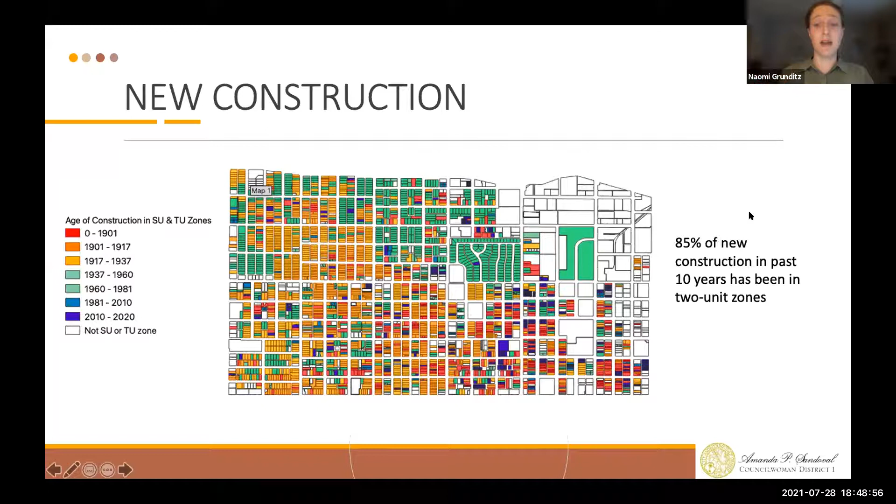In fact, 85% of new construction that's happened in the past 10 years has been in the 2-unit zones. And here's that map again, so you can see how that tracks with where the zoning was.

So I do want to point out a couple of things. One, this overlay is not about changing the underlying zoning, and it does not change the underlying zoning—for example, where duplexes can be built, where single unit houses can be built. I also want to point out that within the single unit area, there's some diversity in zoning that allows ADUs. So there are these zone districts that have a 1 at the end, C1 and B1, that allow accessory dwelling units. There are some areas here where people have been building accessory dwelling units, and they sort of have multiple units on those as well.

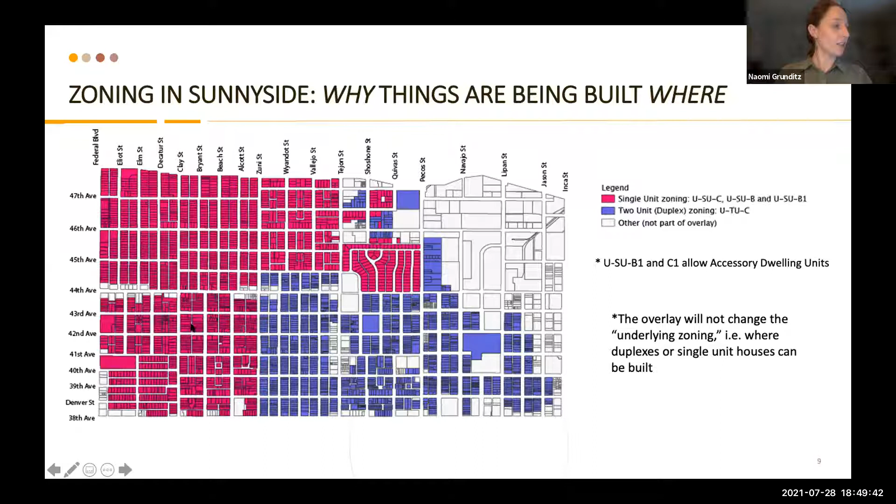Since we're going to be talking about the building and zoning codes, I wanted to first show you an extremely complex and unreadable page from the zoning code. So Denver has a form-based code—really a hybrid code, but when we say form-based code, it means our regulations about building involve more the spaces and volumes that certain types of buildings can take up in different places, versus specifying what goes in them.

So in our 2-unit and single unit districts that we're talking about today, you've got these two building forms you can choose from. There's actually another one called a tandem house, but the duplex form is usually the most common used in areas that allow duplexes. And the urban house form is really the house box you can build a house in, in both districts. So I just wanted to show you what the pages look like.

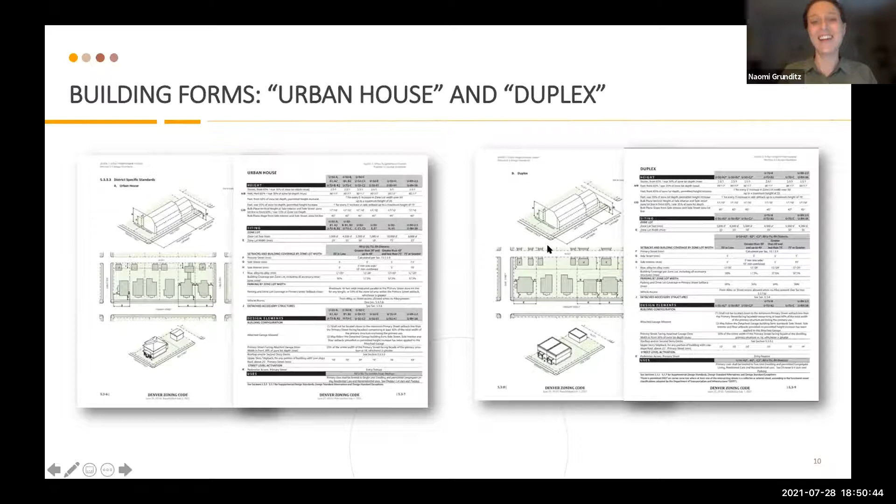I'm going to break it down, hopefully in a much more understandable way. So here is what we call this imaginary, invisible glass box that constrains what you can build on your property. It's called the bulk plane.

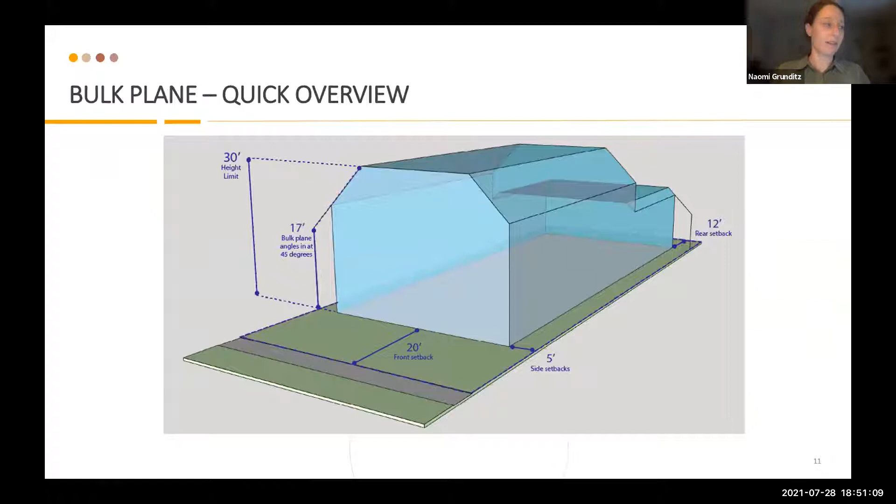This version of the bulk plane applies to both the duplex form and the urban house form I just talked about, so that makes it easier. We'll walk through what it looks like. Essentially, a house has to fit inside it.

This house model I chose is a larger, almost 4-square-ish looking house. It's like 3,000-something square feet, actually pretty big. You can see how it fits inside the bulk plane. There's a few things that can stick out—you're allowed to have little bits of eaves, chimneys, porches, other things can stick out of the bulk plane a little bit, and that's specified in the code.

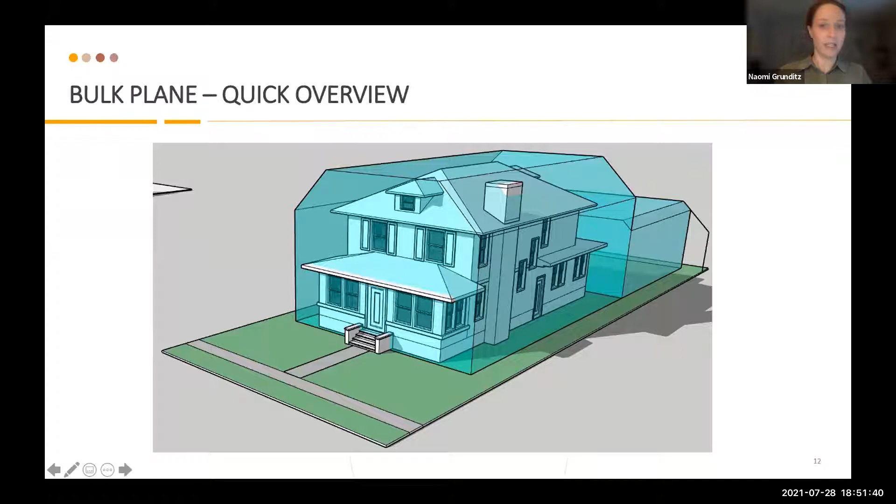But really what's important is these numbers here. The bulk plane, the buildable area, this glass box cuts off at 30 feet. That does go up a little bit on wider lots—you're allowed to have a little bit more height for the widest lots.

In general, the average property size in Sunnyside, both in single unit and 2-unit areas, is 50 feet wide and 125 feet deep. So we modeled a lot on that.

That would be a height cap, a hard cap of 30 feet. It's also a cap of 2.5 stories. A half story is a strange concept, but this is what it is in the zoning code. It's basically a story that is smaller than the story below it by a certain percentage. In Denver, 75% - so this story is 75% or smaller than the story below it. And the area we're counting is where that story is at least 6 feet in height from the floor to the top of the roof. So that's what a half story is.

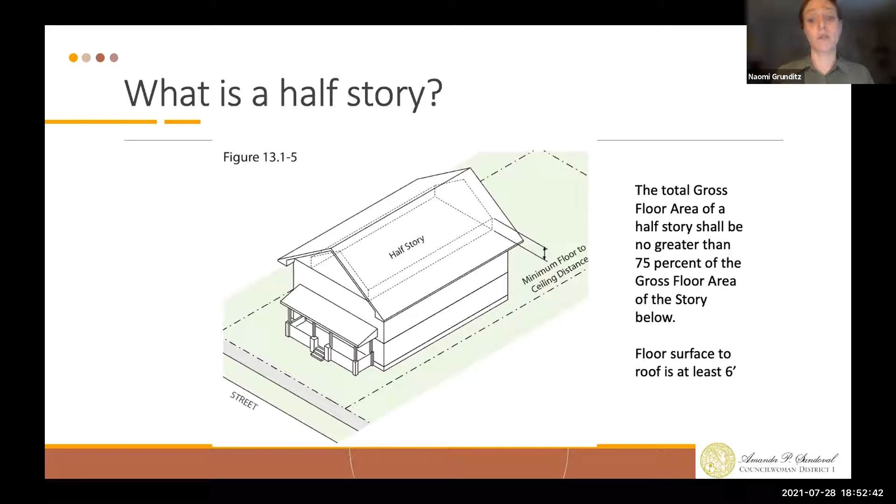Another important part of this invisible glass box is the bulk plane itself, which is this 45-degree angle that goes in at the property line. Currently it starts at 17 feet and goes in, kind of shearing off the sides, as you can see there.

There's also setbacks, meaning you can't build right next to your neighbor's property. These numbers change a bit based on the width of your property - smaller properties get less restrictive setbacks. But we're talking about an average 50-foot wide lot here. You have a setback of... I'm sorry, this chart is actually wrong, the image is correct. It's a 5-foot setback on both sides from your neighbor's property, and there's a front setback from the sidewalk of 20 feet.

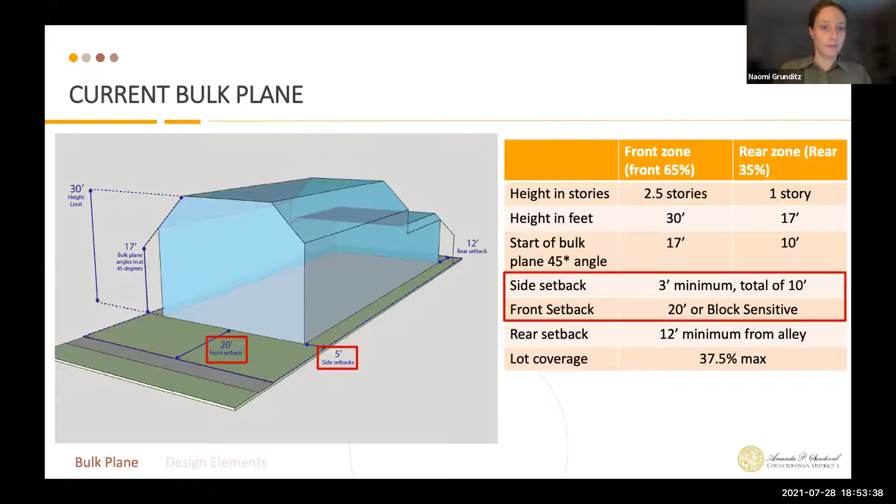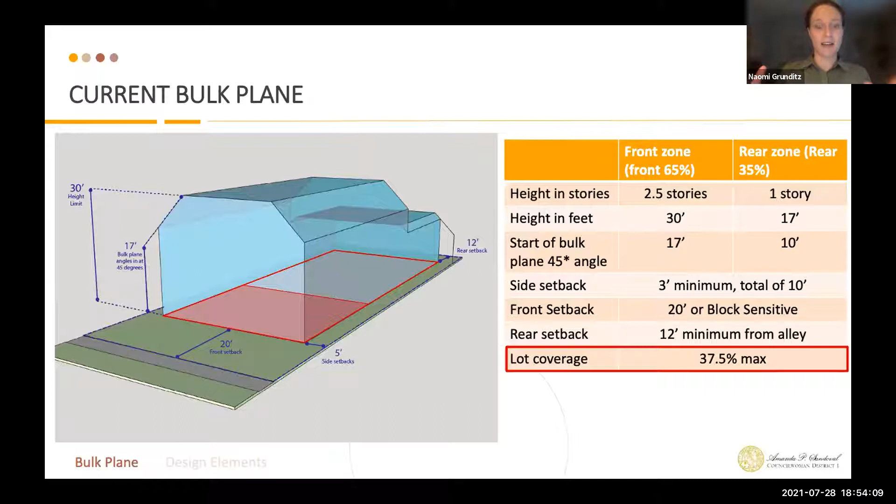The other element that constrains what and how much you can build on your property is a lot coverage maximum. It's 37.5% of your total property. It sounds low, but most people don't end up maxing that out. Things like garages and extra buildings also count towards that, but you can discount half of the square footage of your garage - there are these workarounds. In total, this is again the invisible glass box that constrains what you can or cannot build.

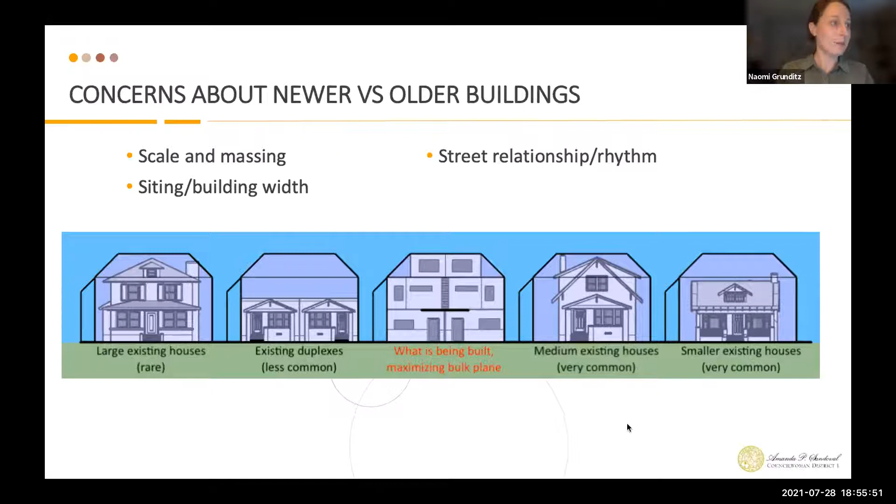So what is an overlay? What is a conservation overlay particularly? It's an extra set of design standards that go on top of the existing zoning. A conservation overlay specifically is a tool in the zoning code meant to preserve, revitalize, or conserve specific areas with distinctive features, identity, or character worthy of retention or enhancement. You can add, modify, or remove any of the rules in the zone district, but there can only be one on one area. And we can't change the uses that go in - like allowing a commercial use in an area that's really zoned to just be residential. A conservation overlay as a tool does not allow you to do that.

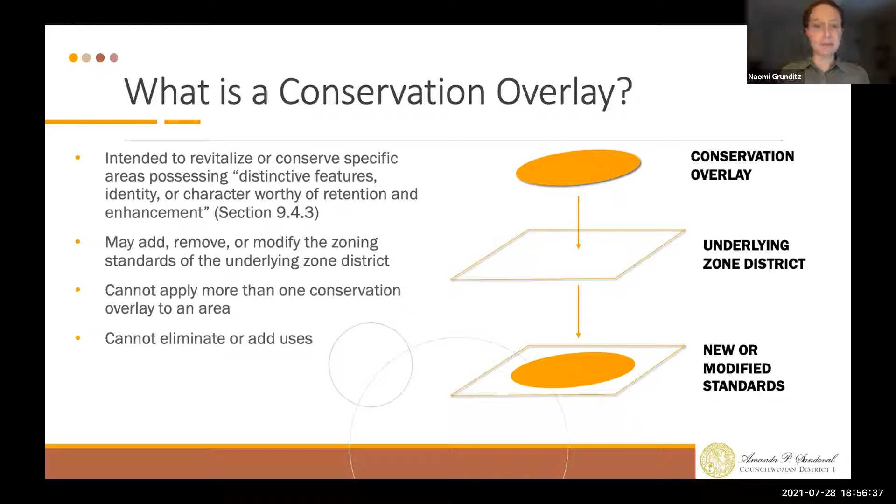If this were to move forward and eventually be adopted, it would be the 7th conservation overlay that exists in Denver. There are 6 others before it. And I want to point out that there's a lot of variety and diversity in what these conservation overlays do. Some of them are much more restrictive, some are much more general.

For instance, the Krisana Park overlay, number 5, is very targeted at this mid-century modern style and really constrains development to that, versus the Potter Highlands overlay, in our neighboring Highlands neighborhood, which is much more general. It's more along the lines of what this overlay, Sunnyside, would be trying to do.

Overlay history has been going on for a long time. Community discussions started in 2018, but I'm sure they were happening much longer before that. This was happening with Sunnyside and with former Councilman Rafael Espinoza. There were community meetings and an initial proposal developed back in spring 2018 by Catherine Cornwell, as Trupti mentioned. Since then, transitioning to Councilwoman Sandoval, we've been convening this working group over the past year and a half to simplify and streamline the proposals and get it ready to come to the community for feedback.

I wanted to talk a little about who we are. We are individuals, Sunnyside residents, and people from the planning department and the council office. There's myself, Bill, Trupti, and James. We've had Catherine, who's an urban planner and a resident, actually building a house using overlay principles, many from the original overlay proposal. We've also had two architects, Kevin and Rod, part of the process, and Brad Johnson from the planning department to bounce ideas off of, as well as many other people who've helped inform these ideas.

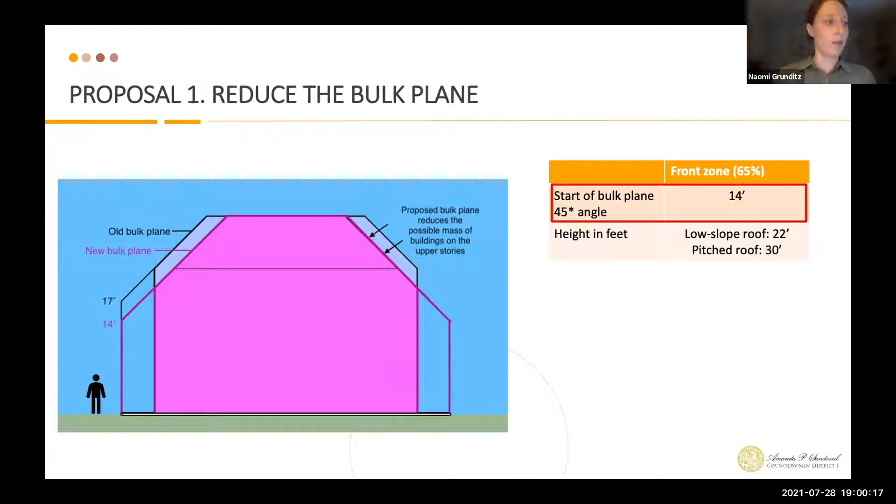The second proposal is to have a separate height limit for low slope roofs, which is the technical zoning code term for flat roofs—a low slope roof is anything below a 4:12 pitch, as shown in the graphic. The idea would be to cap low slope roofs at 22 feet. Pitched roofs could go up to the height they can now. The number 22 came from research and measurements of historic flat roofed buildings throughout Denver, and very specifically in Sunnyside and the surrounds, and was also vetted against some new 2-story flat roof construction, so it's a feasible number for a 2-story flat roof building.

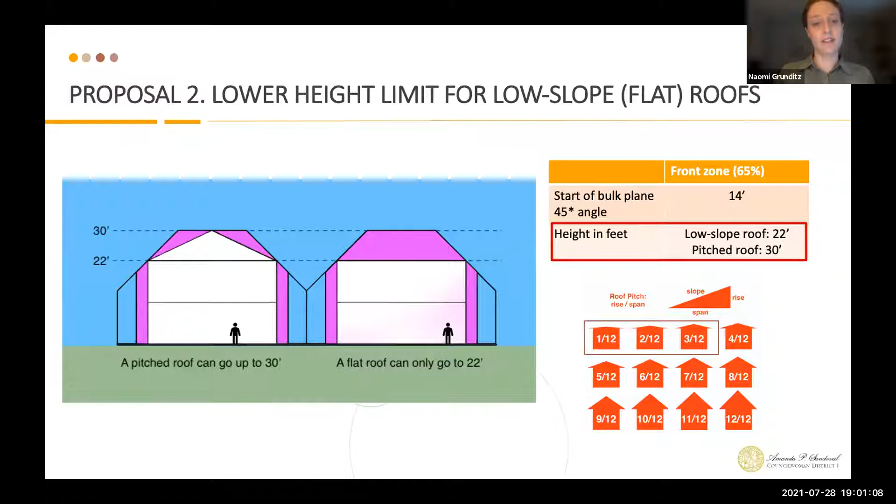Proposal 3 works with lowering the bulk plane, because we understand that lowering it constrains development a bit, but there are ways to still get more buildable space if you allow dormers—traditional architectural elements that allow more living space but aren't as impactful on the mass or appearance of a building. This would come directly from precedent in other overlays. It's really easy to apply and would allow dormers to pierce through that glass box, as you can see in the image here.

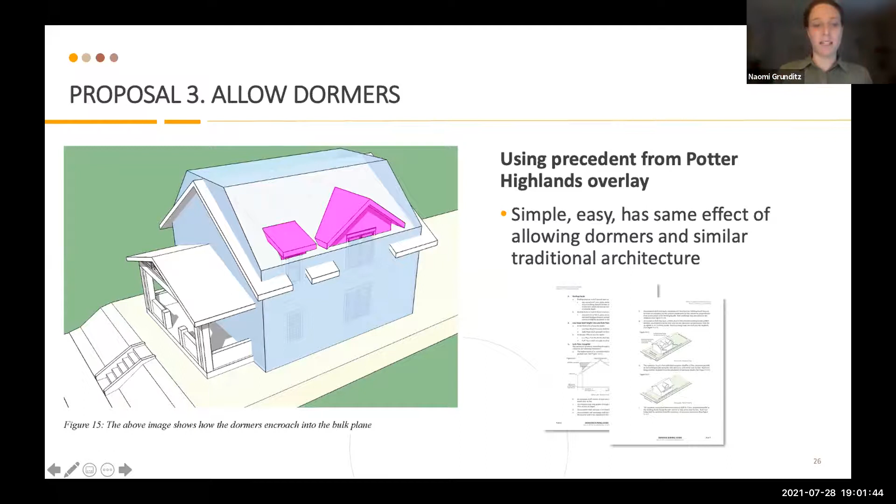Proposal 4 is to require porches. The vast majority of homes in Sunnyside have some sort of porch. Many of them have very large porches, but porches are kind of a beloved aspect of homes in the neighborhood.

They do a couple of things. One, they help step back the bulk of a building. So instead of just one large flat wall of an entrance, there's actually this smaller mass in front and a larger one in back. It sort of tricks your eye into thinking the building itself is not as large. And it provides a transition between the public and private realm.

So the proposal is to have a depth of 6 feet as a minimum. And we've been asking people in the overlay survey what the width should be. Here's some examples. So far, 12 feet is winning, but we shall see how that goes forward.

The only requirements would be that it would be a covered porch, and it couldn't be recessed underneath a story, for instance. It can't be set into it, that wouldn't count. To point out, these are just minimums. You can build as big a porch as you want, and you can have parts of it recessed. There would just be a requirement that some part of that porch stick out 6 feet and be 12 feet wide, if that were to go forward.

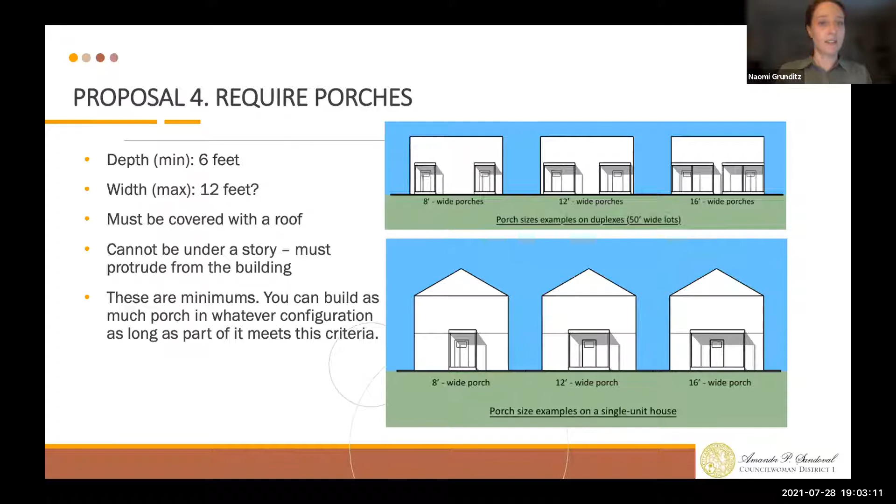Moving on to number 5. This is a proposed cap on overall square footage. This is an interesting idea that came out of conversations with some other overlays. And it's about what homes now look like versus new homes.

Again, to point out that the average current house size in Sunnyside is just over 1,000 square feet. That's not how people live today, and that's not necessarily how people want to live today. It doesn't work for large households. That would be a very small cap.

So the number 3,000 came out of looking at some of what are the largest existing homes, unit sizes, whether single family or a duplex unit itself. What are the largest ones? And you can see with the 30 largest homes built in Sunnyside that they generally cap around 3,000. It's kind of the upper limit.

I'll point out that 20 of the 30 of these largest homes in Sunnyside were built in the last 10 years. Homes are trending larger, and some of these are actually duplex units. So it's not just standalone single family homes or single units, it's duplex sizes as well.

There's one extremely large house that's 5,305 square feet, single unit. And we're seeing some of those being built in Sloan's Lake — there's actually a large trend of extremely large homes being built there.

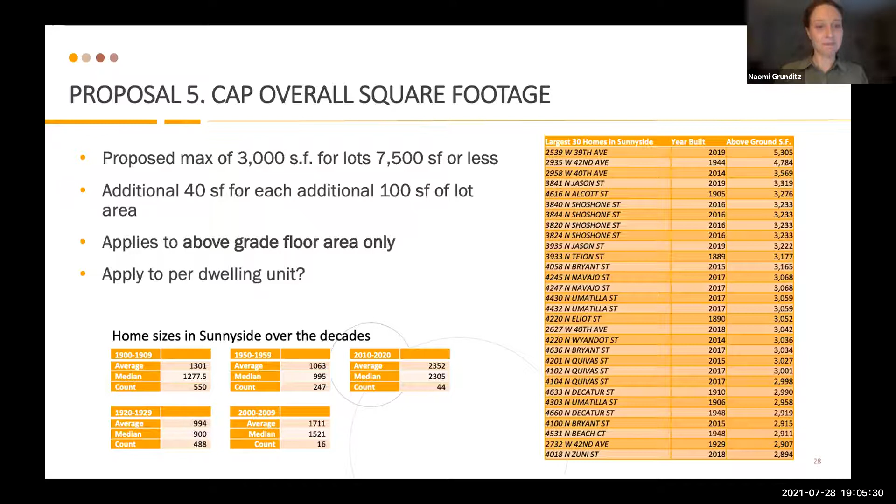So getting towards the end, proposal 6 is setting a minimum building base height. Having a base is an extremely common aspect of most construction, except for the more modern styles once you get into the 50s and 60s. There are certainly exceptions in Sunnyside, but the bulk of homes have some sort of raised elevation.

So this proposal has gotten a lot of concern. I'll call it out already that people are definitely concerned about whether this would impact accessibility and universal design — what about if you're mobility impaired? So that's something we're very aware of and want to have a conversation about.

This standard was included in a previous overlay, and that was a huge topic of discussion, both with the community and at planning board and at council. And there are a lot of workarounds and exceptions built in, if this were to move forward, that help accommodate anyone with any sort of mobility access needs.

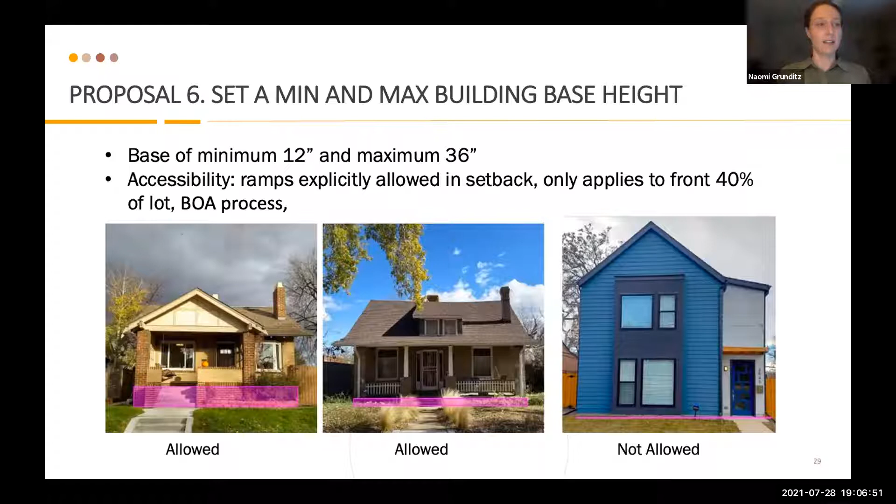I wrote some of them down here: ramps are allowed in the setback, and again, a one foot elevation would be a minimum. It could be waived completely through the Board of Adjustments, but I do want to call out that there's some question from people about how this would impact people with mobility access issues.

All right, well, last one. So now this is a materials requirement question. People do love brick, and it keeps getting talked about, so we really wanted to just put this out there and discuss it.

67% of current houses use brick as the primary building or wall material. This is data from the city assessor. It's a long-lasting material. I think people have a general sense of loss when a nice sturdy brick building gets torn down and potentially replaced with something that is not as well-built. Brick also has attributes of helping break down the appearance of mass—it's like the smaller unit.

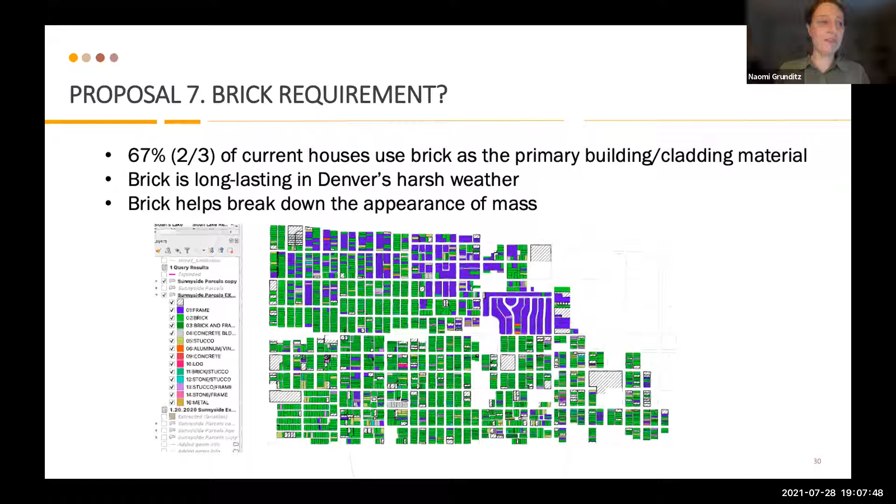So putting that out there, we have the poll open, which I will go now to the summary since that was all the proposals. Survey results so far—we have almost 200 now, but when I pulled it yesterday we had 185. I put stars next to the ones with the highest support. Down here in proposal 7 with brick, we're at 36% saying we shouldn't require brick. That was one of the options. The runner up is that brick should be required to some degree when replacing a brick building. The other options were 'other,' and also that brick should always be required. So this one is an interesting conversation to have.

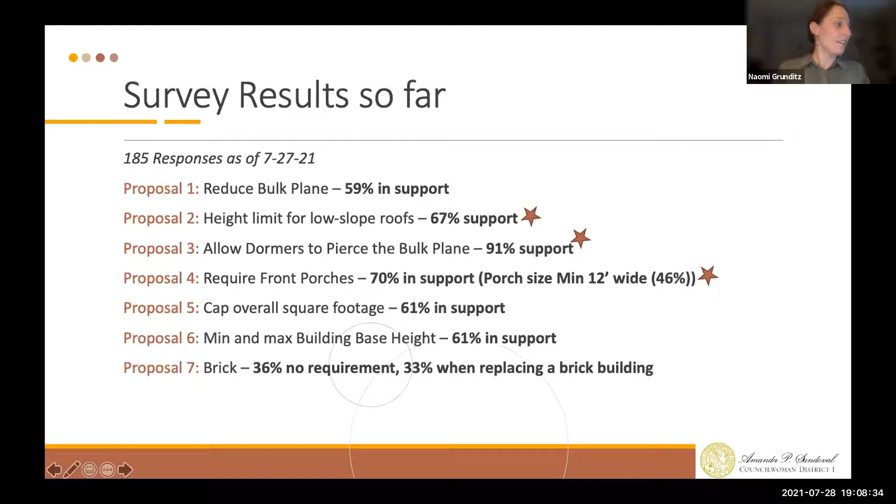All right, I have a couple of last things—top concerns and questions. These are things we're starting to hear from people, both positive and negative feedback. There are people who want the proposed elements to be even more restrictive—a lower bulk plane, or outright prohibiting flat roofs. That's on one side. And then there's also a lot of people who don't see an issue with newer construction in terms of massing. So those are both valid perspectives.

In general, the concerns we can address during Q&A are how these proposals, individually or collectively, would impact housing or construction costs, would impact the ability to pop the top of existing buildings, or generally how small this would make buildings—are we shrinking things down to the point where it won't work for people? And then, of course, concerns about restricting density or affordability, or discouraging duplexes while we're in the midst of needing more housing. My next couple of slides hopefully can answer some of these questions, and then we can dive more into Q&A based on what you want to talk about.

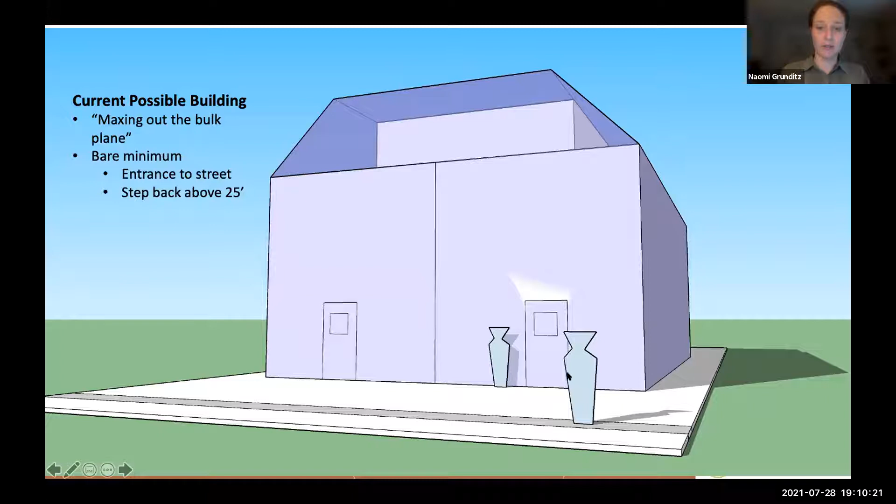I wanted to show with modeling how much this reduced bulk plane specifically, and some of the other elements, would change what you can build. I used this duplex example because that seems to be what people are most interested in. This is the current bulk plane and a current duplex with the bare minimum requirements—entrances facing the street, and the current code requires a flat roof above 25 feet to be stepped back 10 feet. But that's what it looks like, with little geometric people down there for perspective.

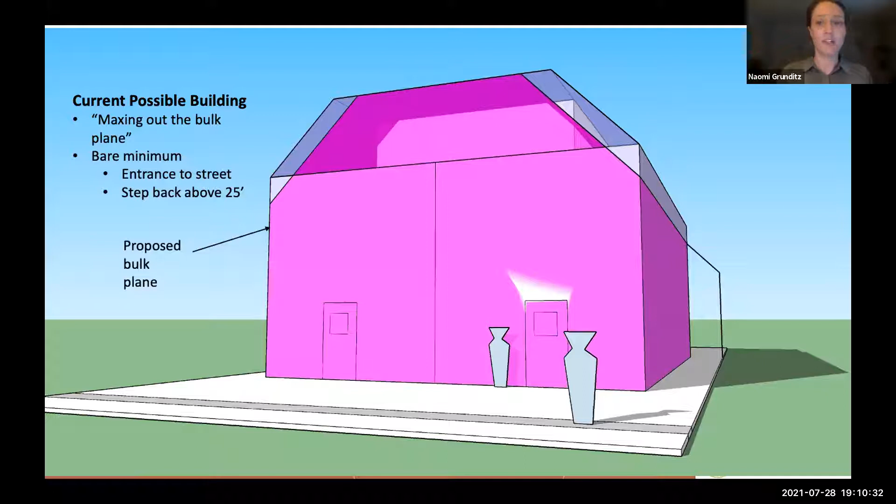This is what the overlay would do in terms of the new bulk plane. You can see how it shears off some of that buildable area. This is just one example—this is what could be built for a flat roofed structure under the proposal. I put the porches on there because they would be required.

The narrower or lower bulk plane incentivizes a narrower building module—we call it the width of the building—because it's most effective to build a wall straight up. If you want to do that up to 22 feet, you're going to set it in a little bit more, so you get ideally a narrower building, which is more in line with what the existing buildings in Sunnyside look like. If you're interested, the first floor of this model is 11 feet and the second floor is 10 feet.

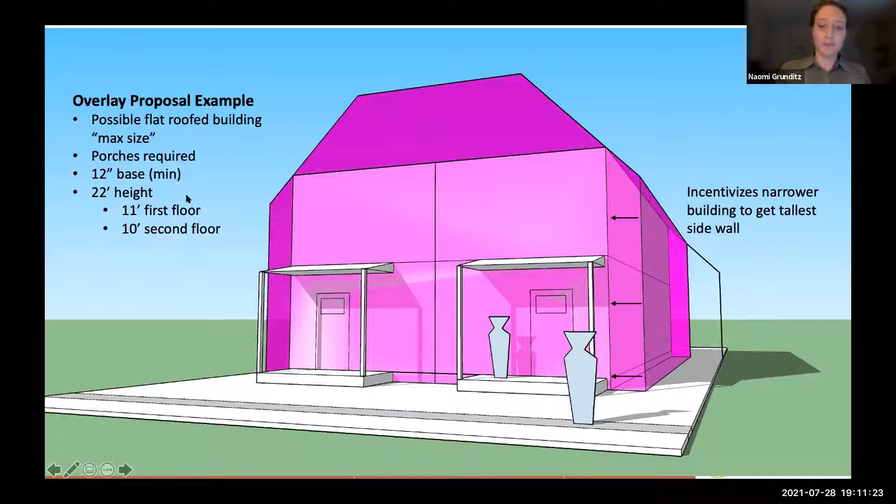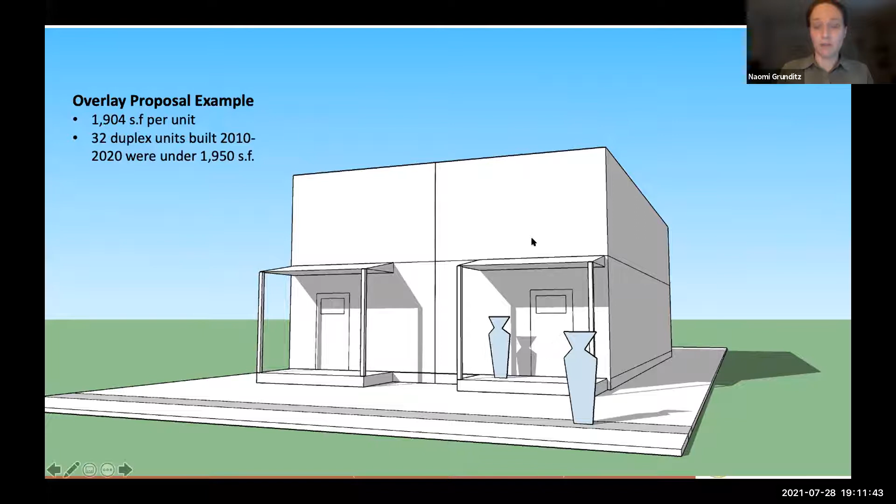Also, if someone were to build this—again, this is just one example—these two units are both 1,900 square feet per unit. To compare that to stuff that's been built recently, there have been 32 duplex units built in the last 10 years that were around or under 1,950 square feet. So not unreasonable, and again, that's just flat roof.

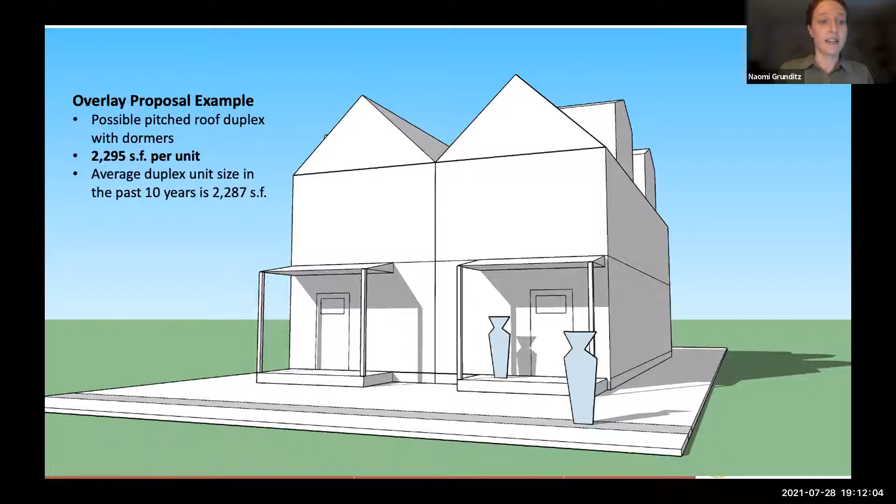If you would like to actually put a pitched roof on there and go up to 30 feet and get some livable space under there, you get up to 2,142 square feet per unit. And if you want to take advantage of dormers, that adds up to a total of 2,295 square feet per unit. And honestly, the average duplex size that's been built in the last 10 years is smaller than that—it's 2,287 square feet. So this all would be possible under the overlay.

And this is just one very ugly, non-architect example of massing and something that could be built.

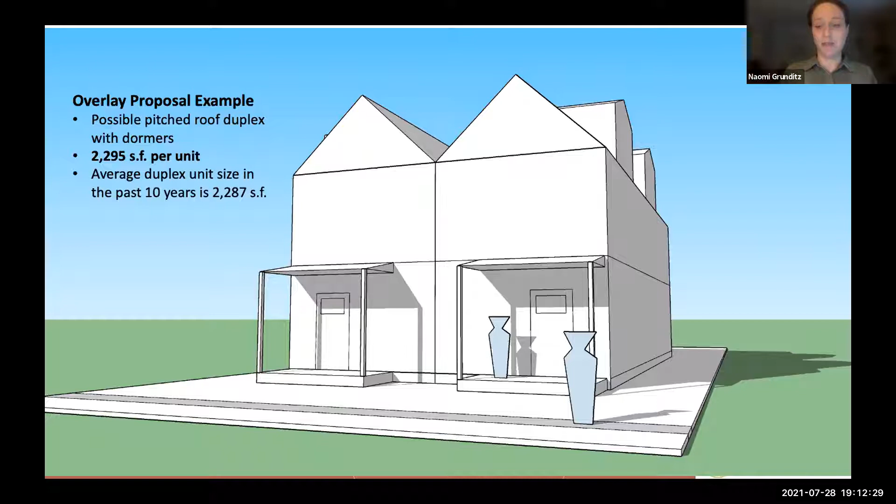Based on this, we'll refine the proposal. As Bill was saying, there may be things that are modified and taken out. For example, in the Harkness Heights overlay, in the survey of the community, we found out that one of our proposals for a porch restriction was not popular, so we took it out. People didn't want it, and that made sense. So we worked with the planning department on that, and then eventually created a technical draft, and also did modeling and testing and a lot more looking into any unintended consequences.